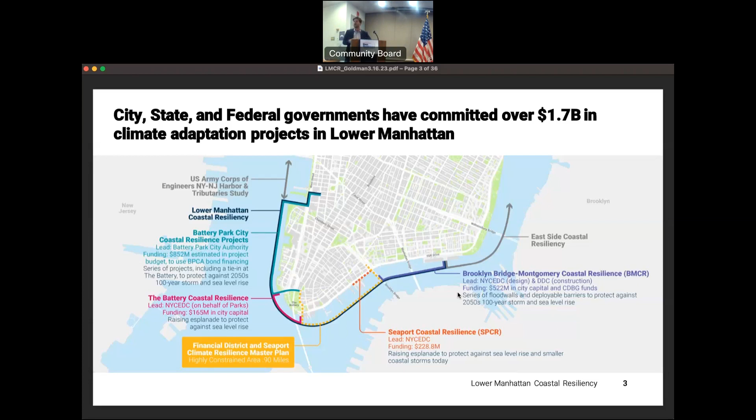East Side Coastal Resiliency, a project that is outside of the CB1 borders but is critically important, and we'll have a couple slides to update folks on that effort, as well as the U.S. Army Corps of Engineers HATS Harbor and Tributary Study, where we'll be hearing from the Army Corps as well. It covers a similar geography, and I'm happy to talk through issues on that as well.

So I think this slide is helpful to give a sense of, beyond lines on a page, what these projects are truly starting to look like. The top image there is our interim flood protection measures.

This is a program that we work with emergency management on. We heard from the community, great, you're doing long-term planning, but what are you doing to make us safer now? This has been deployed in the Seaport and areas of Two Bridges, ways to really buy down risk—not necessarily protecting against a giant Hurricane Sandy storm, but the more frequent coastal storms we expect to see in the near future.

We also have asset-level protection. A lot of our buildings have done critical work—here the image shows some of the work at the Hugh Carey Tunnel, protecting that gate. We also have a series of the BMCR project we'll be getting into, the Battery project, and as I mentioned before, this long-term effort that we're doing in FiDi-Seaport.

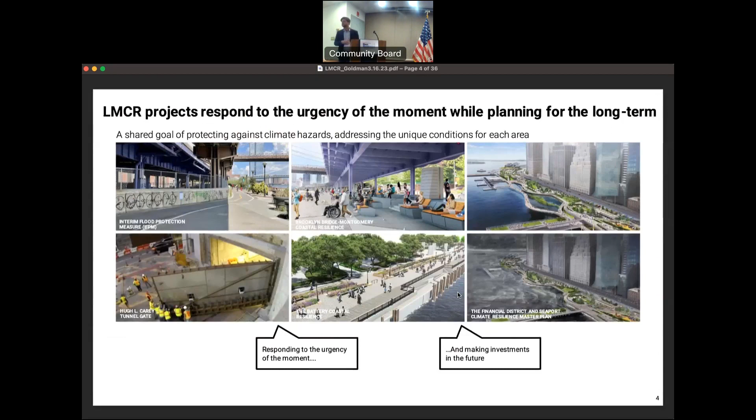So, once again, to give you a sense of where we are with each of these projects: the BMCR project, the one at the top, broke ground in the fall and construction has started. South Battery Park City is following quickly behind, as well as the Battery Coastal Resilience. So I would put those three projects in the first category of construction.

Then you have the next two projects, the Northwest Battery Park City Resilience and Seaport Coastal Resilience, that are in design. There have been a number of recent community meetings and upcoming meetings for Seaport Coastal Resilience, and then that long-term effort for the FiDi-Seaport Master Plan.

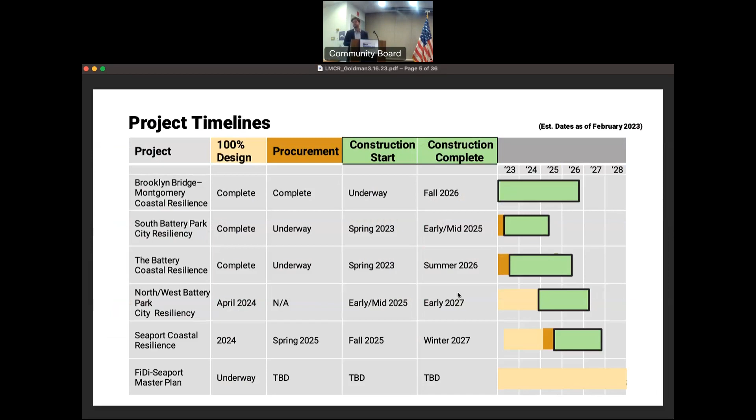Next slide. I know there's a lot of conversation about city involvement, state involvement, and overall coordination. Here you get a sense of some of the city and state agencies involved in these projects—there are many others.

Just to give you a sense, I think we have the front row with our city family, but I wouldn't doubt if there are hundreds of other city folks working on these projects. You can see here, Mayor's Office of Climate and Environmental Justice, the office I work in, really focuses on overseeing this overall portfolio, including LMCR, with a citywide lens and ensuring that policy is consistent across the projects.

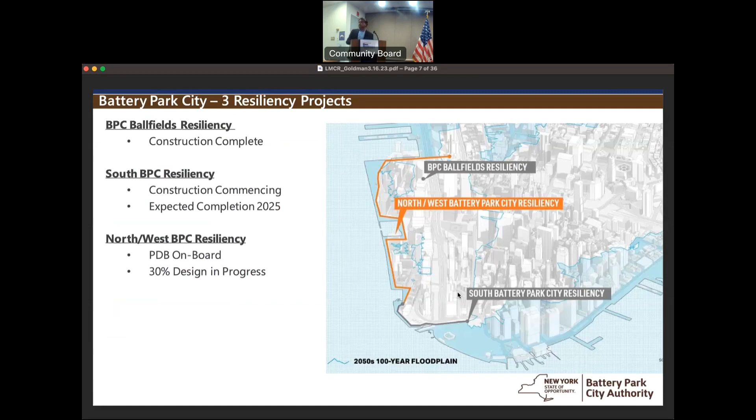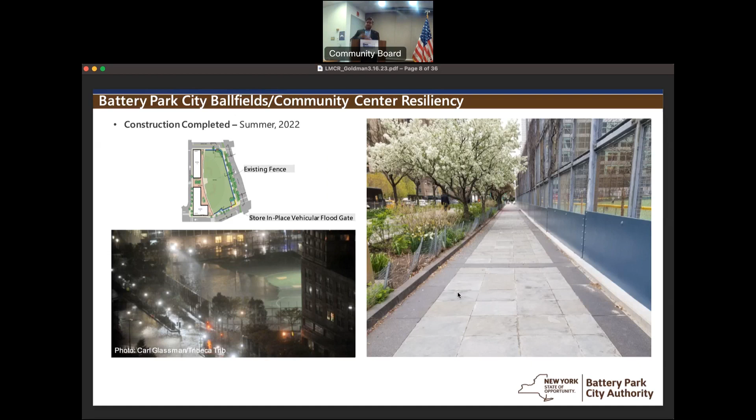Quickly on the Ball Fields Resiliency Project - this is something we completed last summer. The picture on the left is from Sandy and what happened there. It's a low-lying area, it was flooded. What we recently completed is the foundation underneath this fence wall, and then the lower piece with the painted metal wall that you're seeing. All that is there to protect the ball fields until the south and the north are completely done.

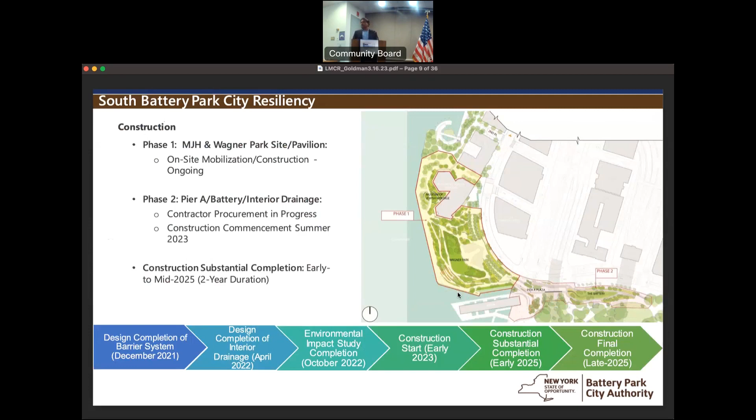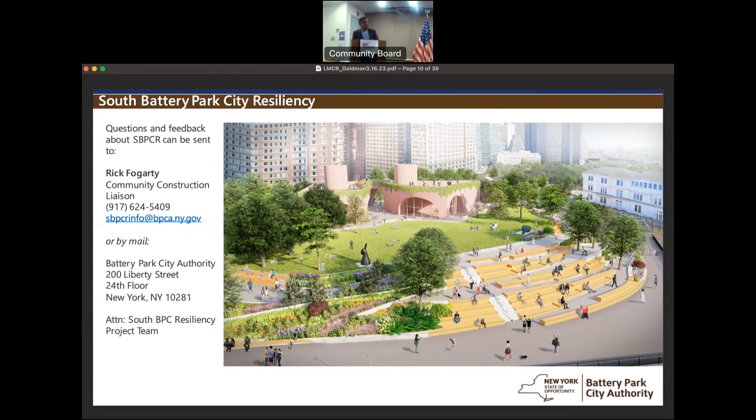As far as community engagement goes now during construction for the South Battery Park City Resiliency Project, we do have an assigned person for that. This information is also available on our website, so if there's any information you need, you can go to our website or reach out to us or to the contact on the screen. Next slide, please.

For the North Resiliency Project, we took a slightly different route in the methodology for design and construction. Instead of a traditional path of design first and then procurement for a contractor, we have gone the route of progressive design build, which makes the process more efficient, smoother and faster. What that basically means is we have a team on board that includes the construction piece as well as the construction consultant, and the design consultant. So they're all working together right now, and it allows us to move through the process much quicker and faster. The PDB team was brought on board last summer.

We've been working through design through a number of community engagement meetings. We expect to complete EIS in 2024. We expect to start construction in 2025 and substantial completion by 2027.

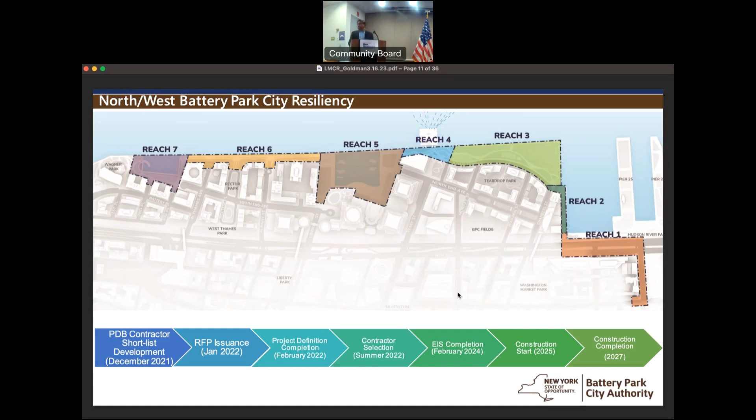Next slide, please. So in terms of community engagement, there have been a number of community meetings last year, including workshops where we walked through the site with community members and explained everything. In fact, one interesting thing we've done is, if you walk along the Esplanade in Battery Park City, you'll see some lampposts painted bright blue. The top of that bright blue line, where it ends, is where we expect the water to be in the 2050s for a 100-year storm.

And it really gives you a sense of what we're dealing with here. That was part of the workshop we did last year in October and November. Starting this year, in February, we've had 4 workshops with the community, a very different format. Instead of just presenting what we were doing, we sat down at tables and engaged with the community. We took all the feedback and timed it so we could incorporate it into our 30% design, which will be completed roughly late spring or early summer. That's when we'll have our next public meeting to present the 30% design. I think that's all I have. Thank you.

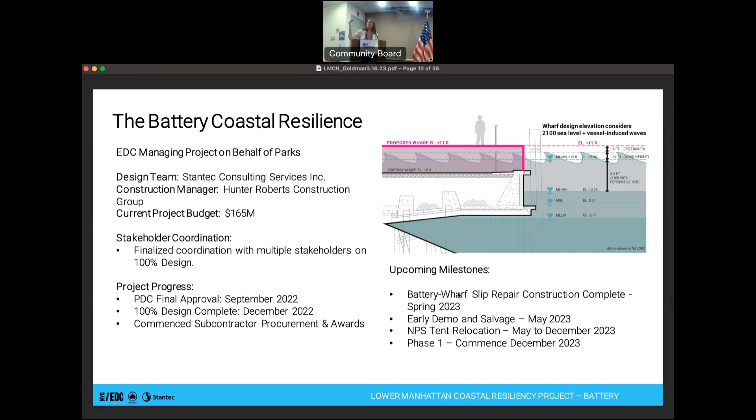I'll walk through a little about the project for anyone not familiar. This project spun out of prior phases of the Financial District and Seaport Master Plan and Lower Manhattan Coastal Resilience Master Plan. It was identified as an early project that could be constructed to protect the city and protect Battery Park against sea level rise in 2100. Where you currently step down to the wharf from the park, you will step up to elevation 11. There's a bunch of lines showing all the different elevations and factors of safety built into the project that get you up to elevation 11. The wharf is currently at elevation 5, for reference, or elevation 6. So this raises the wharf by 5 feet. You can go to the next slide.

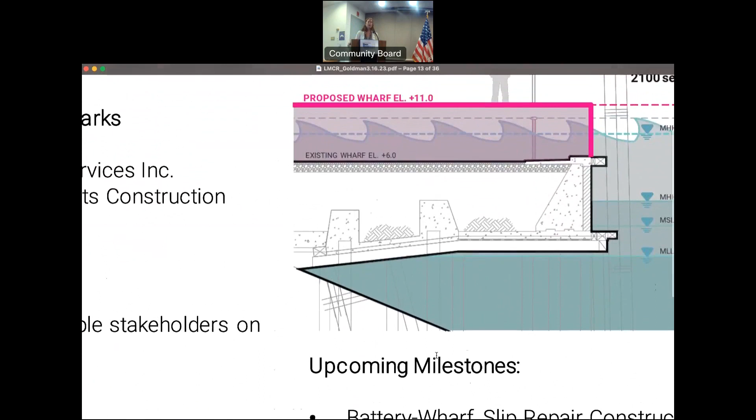Okay, you all can see it.

You will walk up to the wharf instead of walking down to it as you do now. We've really tried to ensure a universal design approach to the whole project, maintaining and actually increasing the number of ramps—sloped paths is probably a better term since ramp has specific technical terminology. So we're trying to have as many sloped paths coupled with staircases throughout the project.

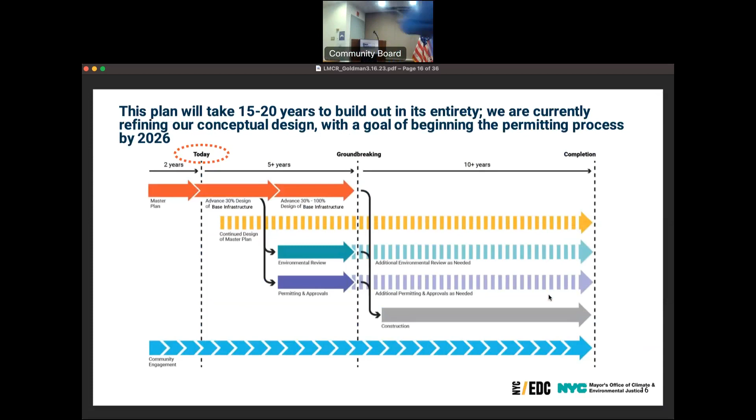As we digest this for a couple seconds, and as we have the aforementioned 8-second delay, I'm going to talk about the Seaport Coastal Resiliency Project, SPCR. This is in the same region as the master plan, seen as a down payment essentially in the same area, while the master planning process will take quite an extended amount of time.

This is a particularly low-lying area where we need to do something quicker, because by the 2050s it'll see rather periodic flooding. So the Seaport Coastal Resilience project creates a more resilient seaport, addresses sea level rise, drainage risks, and improved waterfront access.

The level of protection, by raising the shoreline 3 to 5 feet, will provide sea level rise protection until 2100 and storm surge protection for the 2050s. As part of the federal grant application process, we did apply for BRIC funding. The early project scoping also includes esplanade improvements, ecological enhancements, and green infrastructure to address stormwater management.

Green infrastructure is something we're definitely going to attempt to focus on during this process. This is still in one of the earlier stages - we are working on the RFP internally, and the design will be developed once we move further along into the design process and have a consultant on board.

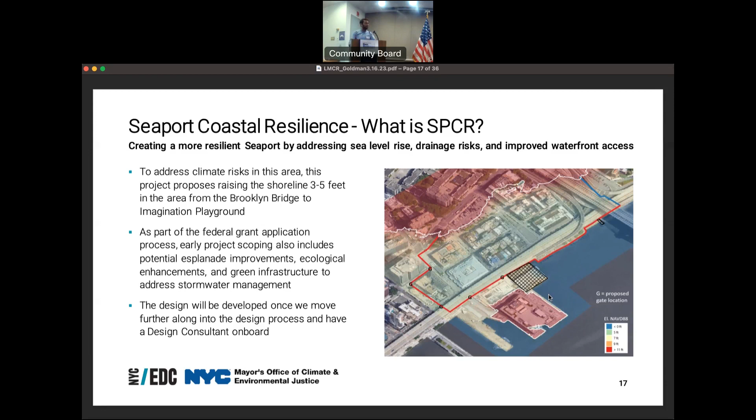Because we're still in the early process, we're still developing the RFP. Our next step is to continue to coordinate closely with the community. As for funding goals, we have 170 million of city capital.

We have 50 million from FEMA in our BRIC grant - this is the highest amount that's actually allowable, so that was a large win for us. Then 8.8 million from the Howard Hughes Corporation to go towards the waterfront esplanade and public improvements.

The next steps: the BRIC award process is ongoing from FEMA. We have a notice of award, but we're still waiting on the formal piece of paper that says we're awarded - that should be coming imminently. The beginning of procurement of the design team is also imminent as we're developing the RFP.

To reiterate and really stress this: when we have a designer on board, we'll regularly coordinate with the community and stakeholders and share updates via any type of meeting that we need, and quarterly updates with CD1. So, thank you all.

I think we have the BMCR next.

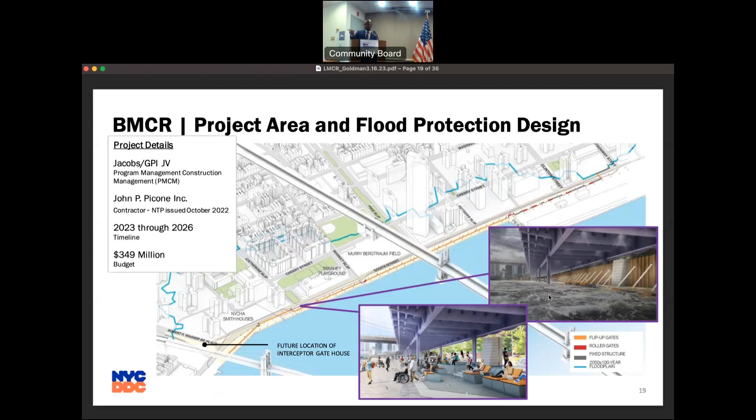That was the code, I got you. Oh, there is a delay. Okay, that's a delay, I'll watch that one.

So now we're going to talk about the East Side Coastal Resiliency Project, ESCR. I'll mention this is DDC's pride and joy—perhaps just because I'm on it, so perhaps these are just my words. But we've spent a lot of time working hard on this project.

Right now we are in construction. I guess the first thing I'll mention is that the way ESCR provides flood protection is a little different from BMCR. With ESCR, we have the ability to provide flood protection via an array of swing gates.

We have roller gates. We also have gates that are above ground. We have flood walls that are below ground, so that in the event there's any stormwater coming in, we have that protection below ground as well.

We have sewer, combined sewer overflow, or CSO, expansion, so again we can handle the stormwater. And we have so many things—one of the biggest is that we're actually raising the entire East River Park by 8 to 9 feet. All those together really form a very comprehensive way for us to protect our waterfront.

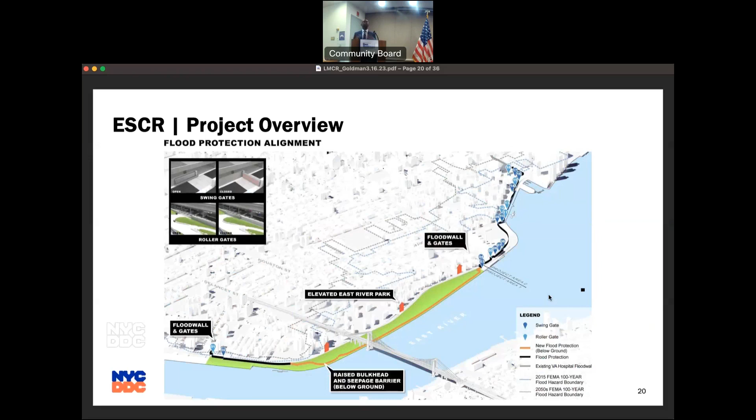While we're doing this very critical flood protection work, we also see this as a great opportunity to improve the waterfront. We're providing new amenities, taking every opportunity to improve the drainage, and bringing in new trees and new planting material that can withstand storms and seawater.

For ESCR, it's important to note that we've broken it into three separate areas. So let's say if BMCR went from the Brooklyn Bridge all the way to Montgomery Street, ESCR begins at Montgomery Street and extends all the way up to East 25th Street. So now we're talking about protecting not just the East River Park, but also the districts of CB3 and CB6.

Staying on this slide, we've broken up the area into three specific areas. Project area 1 starts from Montgomery Street to East 14th. Project area 2 goes from East 14th all the way up to East 25th Street. And then we have PC, or parallel conveyance—I'm sure you guys have heard about that. It's located at various locations within those borders where we do that sewer upgrade work.

Focusing on construction and the construction schedule for project area 1, it's important to note that project area 1 is divided into 2 areas. First, we have the lower end, or rather the southern end, which we're calling phase 1, which is supposed to be done by roughly 2024.

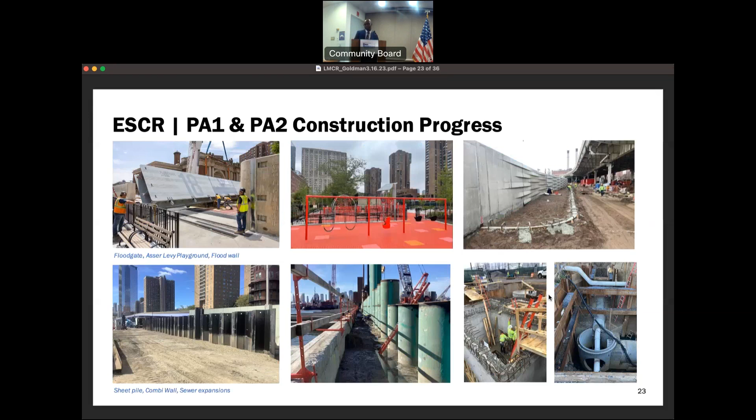So that was mine, okay. And I'm so glad, Congressman, that you had mentioned the importance of community engagement. So I'll mention that DDC has a very robust community engagement team. In fact, right now there's also a CB6 meeting, so we've actually had to split our team in half, and they pulled me from the field to help out, so my pleasure to help out.

With community engagement, we take it very, very seriously. In addition to communicating with the community, we make it our responsibility to also educate the community. So one of the things we've been doing is reaching out to local schools and meeting with them, giving them mini lessons about what this project does, this project that's in their backyard, and giving them a real understanding of what the construction process is.

I'll also mention that in our community engagements, we've reached out and launched a call for art where we were able to involve full participation for our students so that we can have their participation as part of the project.

And I'll end by saying these coastal resiliency efforts are very important to us. At DDC, we are absolutely proud to do this work. I'm absolutely proud to be on the field to do this work. So thank you so much.

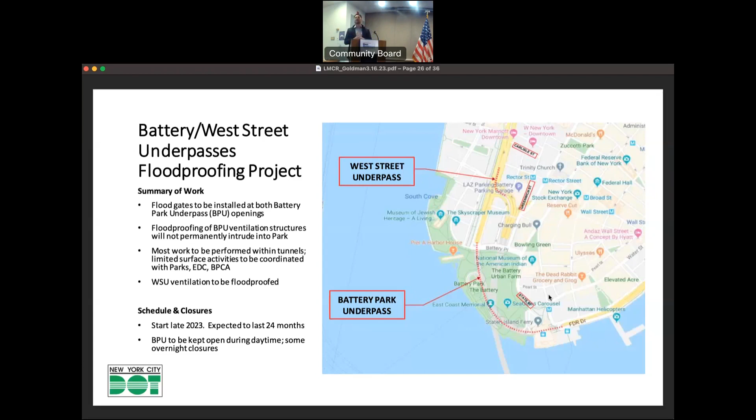For the West Street Underpass, the flood protection is just on the ventilation openings and chambers. The start date for that is late 2023, and it's expected to be a 2-year project. The Battery Park Underpass will be kept open during the daytime, closed at night.

The next project I want to talk about is the Whitehall Terminal Flood Protection Project. The ferry system, both in Lower Manhattan and on Staten Island, suffered a lot during Sandy. So there are projects in both boroughs to protect the facilities we have. Here the flood mitigation is both structural and protecting electrical equipment, computerized systems, and mechanical systems.

There's a lot of different components to the flood protection there, what we call wet and dry flood protection, meaning some of it will be designed to flood. That has FTA and city funding, and there's a design-build RFP targeted for spring 2023. Thank you, and happy to answer questions.

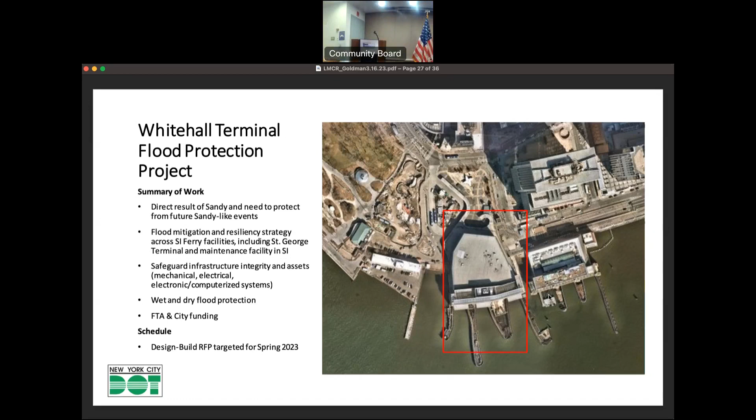I know we have one final slide just on upcoming engagement. It sounds like we want to move to the Army Corps folks, but I wanted to briefly mention a few of these projects. As I mentioned, there's ongoing construction. We will keep coming to the community board with updates, but it naturally moves into a different phase. Battery Park City, that south project, will be heading into construction shortly.

Northwest Battery Park City - many of you have been attending their Reach by Reach workshops. The last one, I believe, the North Cove, was last night, as well as an upcoming meeting when they hit 30% design later this spring. Seaport Coastal Resilience and FiDi-Seaport Master Plan will both be entering phases with a lot of engagement. There's an RFP coming up for Seaport Coastal Resilience, and then FiDi-Seaport Master Plan.

We will be doing a series of workshops on specific area issues. We had one on maritime earlier this week, and we'll have a variety of others. We do offer individual briefings - anyone who wants to hear about our work, we're happy to meet with you. So thanks, everyone, sorry for how long that was.

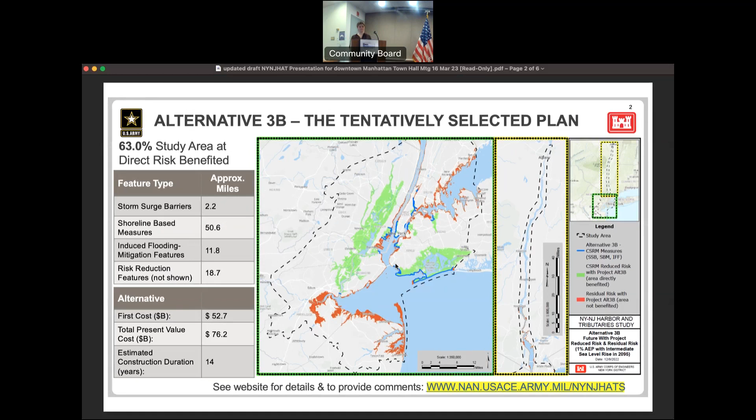So this is just a zoom in of the tentatively selected plan features in the area of particular interest today. It consists of roughly 6 miles of barrier - a total length of 31,000 feet.

These measures, as you can see, there are different colors along the waterfront. These are very preliminary, very conceptual, but it would consist of a combination of flood walls, levees, flip-up barriers, pedestrian and vehicle gates, elevated promenades, flood walls with parks, and seawalls.

We do understand that there is a lot of complexity in the area, a lot of flood risk, both from coastal storm surge and from interior stormwater, rain, and interior drainage issues. The analysis we did incorporates interior drainage structures and pump stations to reduce the risk of interior drainage flooding, but we do need to take a deeper dive into that.

We do understand, as presented today, that there are a ton of really great plans and concepts ongoing in the area, or in the process of being built or in design. So we do need to reconcile our study with those, but again, we're at a very preliminary stage and we are happy to do so.

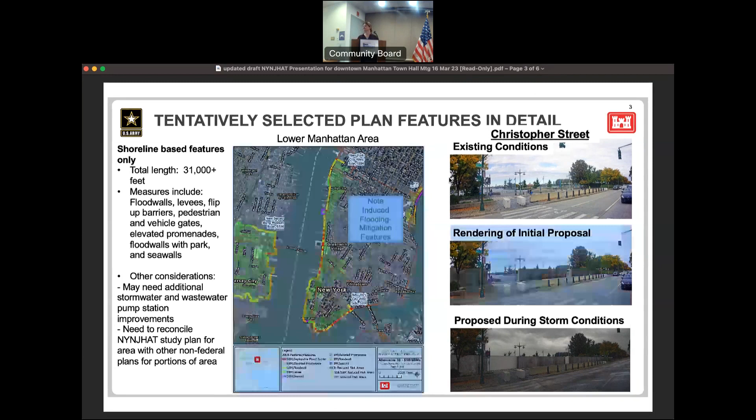If things go super smoothly, we aim to have the end of the study in 2024. That may very likely get extended, yet to be determined - we'll reevaluate once we get all the comments from all the agencies at the end of the month. I do want to note that this is just the end of the study phase. After the study phase, we need to get congressional authorization and appropriations to move forward into design. So there's still a lot of room for comments and improvements.